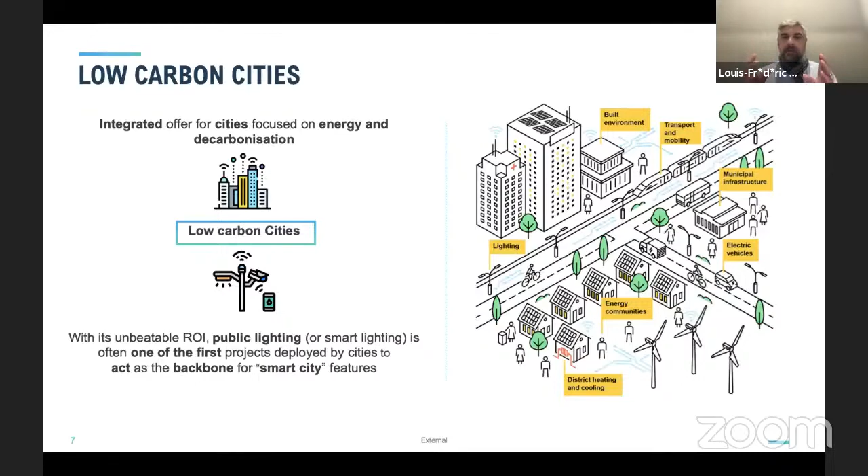You see on the right part of the slide that municipalities, if you want to go to sustainable cities, you need to mobilize lots of solutions. The question is, what is the appropriate bundle of solutions you need to offer? It could be district cooling, it could be energy communities, it could be lighting, it could be energy efficiency in buildings, it could be traffic, smart mobility, sustainable mobility, whatever you need. But the most important thing is you need to know where you want to go and be ensured that the infrastructure that you will mobilize, renew, or develop will be able to handle various services to be offered.

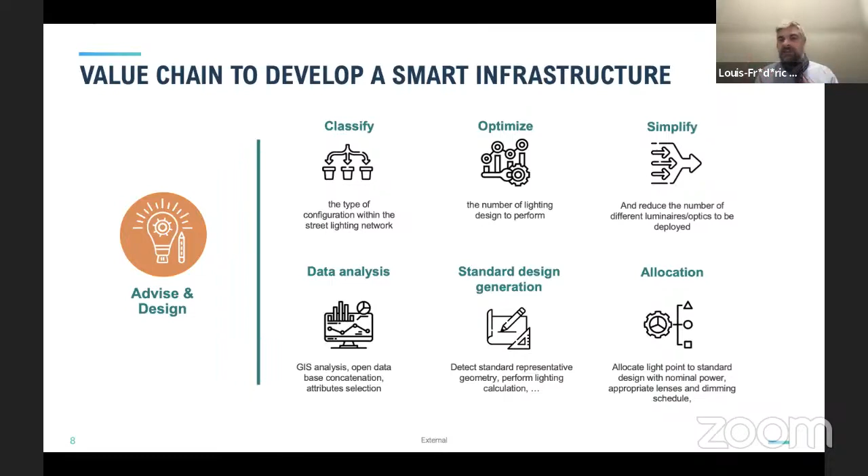To do so, we believe it's important to advise and design, meaning that you need to classify, optimize, simulate the impact, simplify, really take advantage of the data on the ground. And we are very, very active in that area in the regions about data analysis, making standard design and generation in order to industrialize, scale up, and allocate.

Then using digitalized solutions to build and have an effective procurement process, mainly under the PPP framework. Definitely this is the most advanced one, and this is the one that offers the most transparency for municipalities and capabilities. You need to contract properly.

You have also to combine what I've mentioned earlier in the discussions: the supply of energy, how to generate on-site generation, how to generate renewable energy on your territory, and embedded flexibility. Flexibility, energy storage, electric or thermal, is definitely key in the future.

The third point is how you engage with your stakeholders, because a municipality is a bundle of various layers of population, citizens, administration. So you need to engage your stakeholders. You need to build environmental plans. And then you have to operate and do the things.

So you have to monitor the performance with the KPIs. You have to digitalize your solutions, and you need to be able to develop new services all the time. And to be able to do so, you need to have thought before, one step before, about this smart and mutualized infrastructure. This is key.

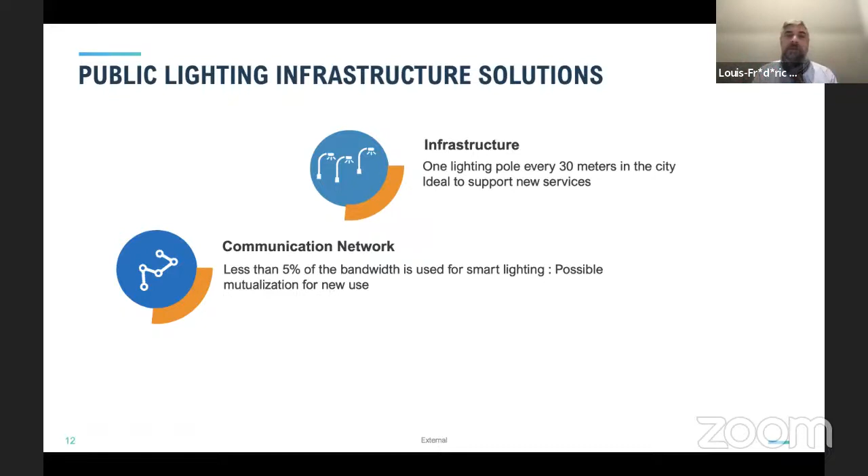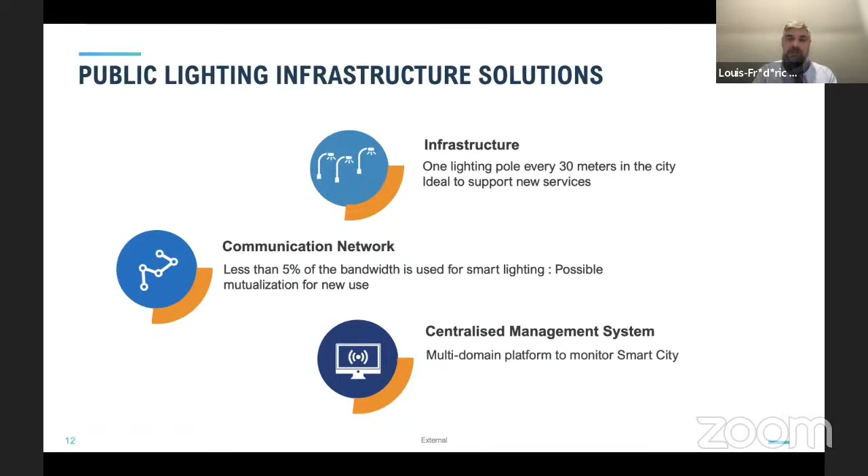We will also have a centralized management system, so rather than having people patrolling everywhere, the system will be smart and will send alerts. We will only need to react when there's a default on the system. This is far more efficient than the previous way we were operating the infrastructure, definitely. With this centralized management system, you also have the opportunity to oversee many activities on the infrastructure. This is the kind of ideas you can develop on one infrastructure—it could be mobility, security, communications, well-being with air quality sensors, temperature sensors, dust sensors, and of course a very good and efficient lighting offer.

If you want to go a bit further—remember, we thought it was good to have a renewable supply, having smart infrastructure in the middle of that—then you can accelerate the pace to go to zero carbon cities. You can go a step further and have the appropriate bundle to go in every direction needed to accomplish the vision.

This is definitely where I want to showcase this public-private partnership approach to really boost the energy transition. What is key now for municipalities is to benefit from expertise, finance, and long-term perspective. This is where the public-private mechanism is a real good opportunity, because of the capex intensity. If you want to invest in lighting, energy efficiency, solar panels on buildings, district cooling, mobility, EV chargers, or public transportation—whatever solutions are appropriate to your territory and municipality—you will have to invest a lot of money, and you have to stay on a long-term basis and offer economic and financial performance for both parties. For the public, and I'm very clear on that, we need to share the value with the public authorities.

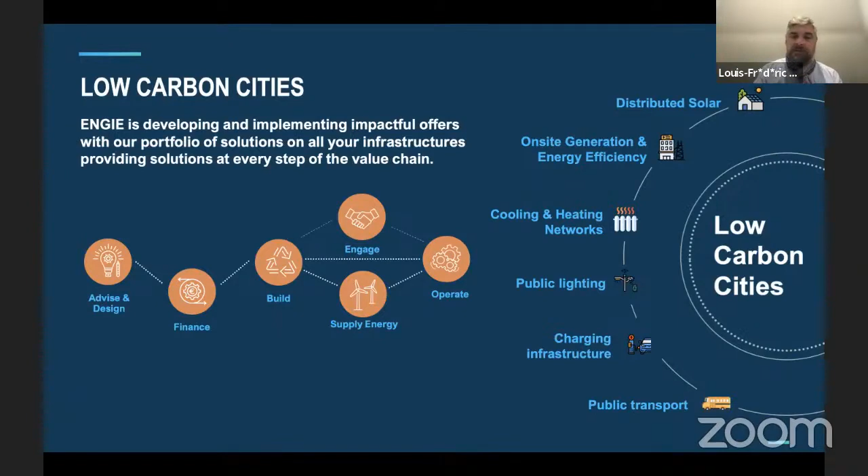Here's some case studies. Milpitas in United States. This is a 10-year smart city program for energy and water savings.

Within that contract, we have installed 200 kilowatts solar PV, quite small, 5,000 smart meters for water and leak detection, 6,000 street lights, and we have invested money, 1.5 million dollars saved for the municipality. On the lifetime savings, this is 50 million in energy savings and operation and maintenance savings. So this is quite huge for a municipality.

Angers Métropole in France. This is the second smart city contract in France, the biggest one. It's a 12 year contract where we will develop smart lighting, smart savings in buildings, smart water systems, and energy efficiency in all the public buildings. So this is really, really key. And they have also safety integrations. On top of that, there will be a digital twin and a digital hypervision solution that will benefit the municipality's team to really oversee all the activities in the municipality.

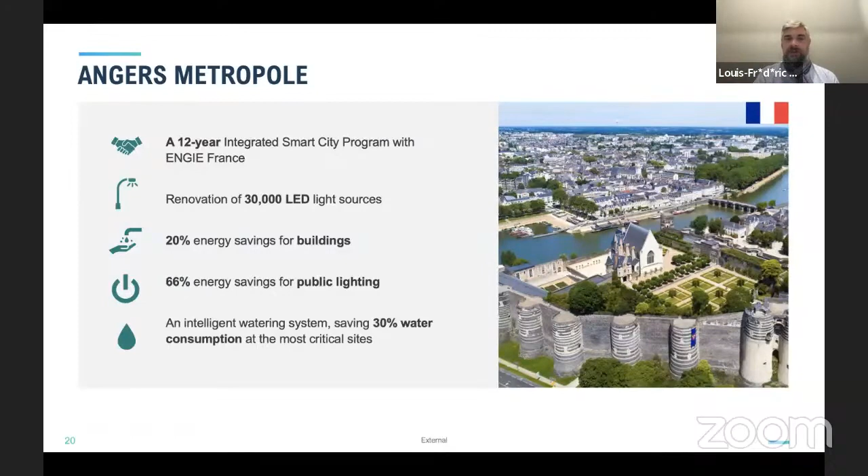Santa Barbara Unified School District. This is a 10-year contract with solar. We have embedded energy storage. We have also embedded a 28-year PPA, the power purchase agreement, with performance guaranteed. So you see that we can take that commitment.

One of plenty of examples just to showcase how we bundled various solutions depending on what are needed on the territories.

Ohio State University, this is a 50-year contract with solar, with battery storage, with smart meter. Now we have embedded also lighting, geothermal energy, biomass.

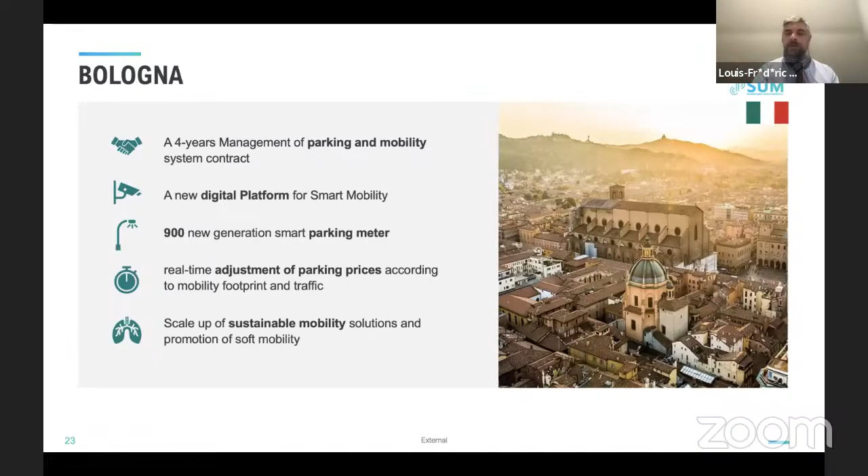In Bologna, this is a parking and mobility contract. So we are able to manage the price of the parking slots to adjust in real time how many people we want to come into the town center. In Niteroi, it's about safety and so on.

Thank you for your attention. What I want to resume in a nutshell is that you need to think about how to mobilize at maximum your renewable potential, think about smart infrastructures in the middle, mutualize on them, develop new services, and finally find under the PPP model the most appropriate bundle of solutions you need to deploy on your territory to go to a sustainable city. Thank you.

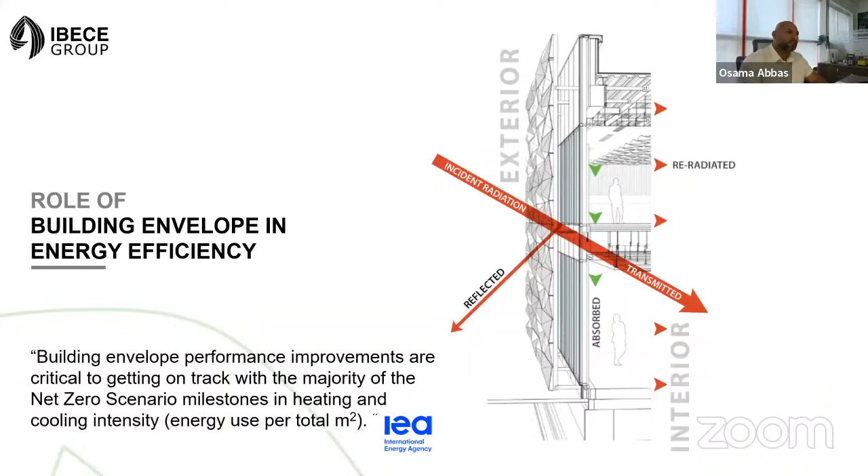Here we're going to talk more about the building envelope. It's envisaged as a kind of glass skin, or a pot, in which people live, and it basically separates the outside from the inside. That's the function of the facade, the building envelope: to provide thermal comfort, to provide a good environment for people to live in, to feel warm when needed and cool when needed, and not to be affected by external weather elements surrounding the building.

It has the function of shielding tenants from the sun, allowing enough daylight, and preventing wind, dust particles, and pollutants from coming into the building, as well as handling rain so there's no water infiltration. Some other aspects relate to acoustics and the safety of the tenant as well.

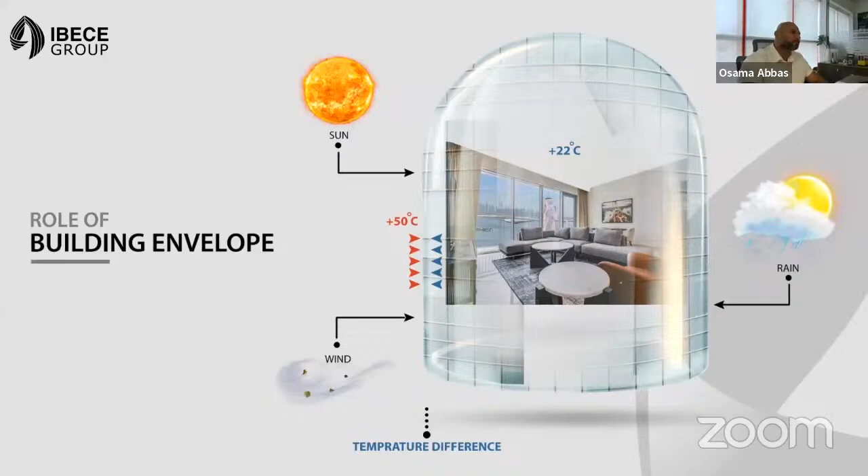According to the International Energy Agency, there's a big shift towards removing the old stock type of facades and using new types of facades. As an example, throughout the years there is a trend to use more energy-efficient materials in the facade.

The building envelope, according to the IEA, is expected to save almost 6 exajoules in 2050 under the 2 degrees Celsius scenario. If we're able to reduce our cooling loads by 2 degrees, we can reduce 6 exajoules by 2050, a number equivalent to the current total energy consumption of the UK.

You can see from the scenarios that inefficient facades formed of single pane windows, no insulation, and high air leakage are quickly being replaced by highly efficient elements. For example, low-E glazed windows, high levels of insulation, and low air leakage, leading to very advanced, zero energy buildings with what we call passive facades that help a lot in achieving the net zero requirement.

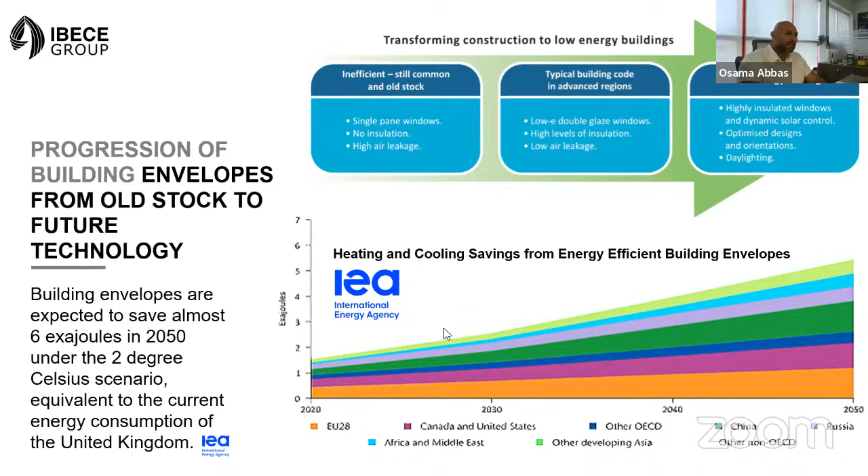This is also an interesting slide. Here we talk about retrofit, because while we can always talk about new buildings and how we design them to be energy efficient, the fact is a new building 20 years down the line is also an old building, let alone the old buildings we have now. There must be a way to understand how much energy savings we can make by retrofitting facades in existing buildings.

This is a simple scenario when we're taking a baseline scenario of inefficient facades, where we are consuming around 650,000 kilowatt hours per year of energy. Then we do 3 levels of retrofit. Retrofit level 1 is the basic retrofit, which is not invasive. Then we go into a medium type of retrofit, then into a deeper retrofit.

As you can see, ladies and gentlemen, the values differ a lot. The building used to consume 653,985 in HVAC electric consumption. From 650K we go down to 570K, then 510K, ending up at 450K. So that's around 31% decrease in the amount of cooling load from our HVAC system.

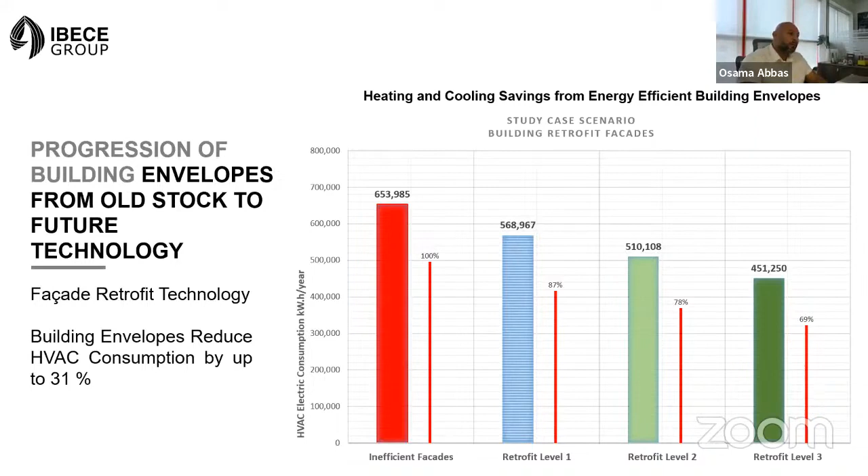Next slide, we're going to talk about what we as IBECE Group are doing to help support this. We use our expertise as facade engineers to create a system in which we are able to read the pulse of the facade. It's like when people go to doctors and take their pulse, heart rate, and blood pressure — it's the same thing here with facades.

What we basically do is have something called FESPA, which is short for Facade Energy Saving Potential Assessment. FESPA is a very detailed way of scanning the building to understand whether the facade is a source of energy leak or not. Accordingly, we determine how much energy is lost — through radiation, convection, conduction, etc. — and propose alternatives. These alternatives can easily be linked to simple payback schemes, so CFOs can know how much they'll have to invest and how much will be returned by the building in savings.

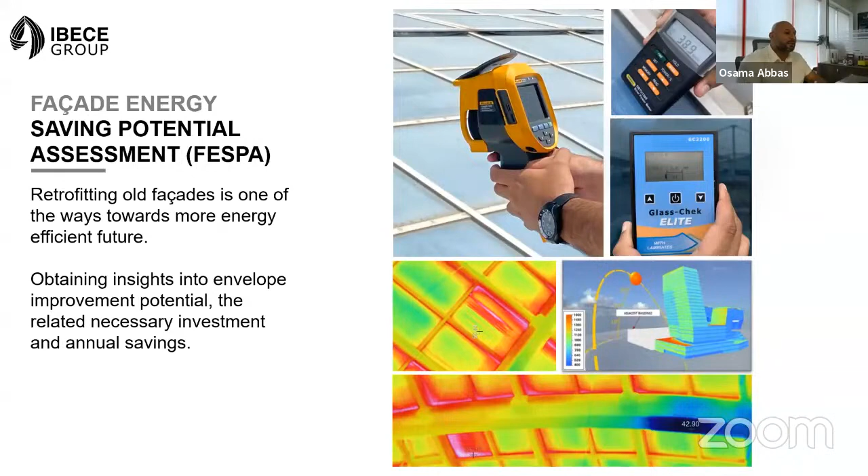This seminar goes under a big title, Smart Cities. That's why we here at IBECE decided to talk about smart facades as well, not only about energy savings, but the smart facade, which also entails some savings.

What are smart facades? Here you see on the right, Al Bahar Towers in Abu Dhabi, UAE, designed by AEDAS and constructed by Al Futtaim Carillion. It's one of the few buildings in the UAE which is very responsive to the climate around it. So a smart facade is a technology-loaded advanced facade, in the sense that it enables the building to be more energy efficient, reduce carbon footprint, add real estate value, and provide users with the highest levels of thermal comfort, daylighting, and glare control.

Now why are smart facades able to do that? Well, when we design facades, we have the option to create dynamic and responsive facades, in which these facades change their size, their form, their opacity, so that they provide more comfort to the end user.

For example, if the sunshade here on the right, with its sensors, feels that the sun is hitting the glass at a quite high radiation value, the smart thing to do is to close up. So this thing closes up and opens up based on sensors and control units, so that if we have high levels of solar intensity, the facade closes up, reduces the amount of heat coming into the building, and therefore brings thermal comfort, because people will not feel hot.

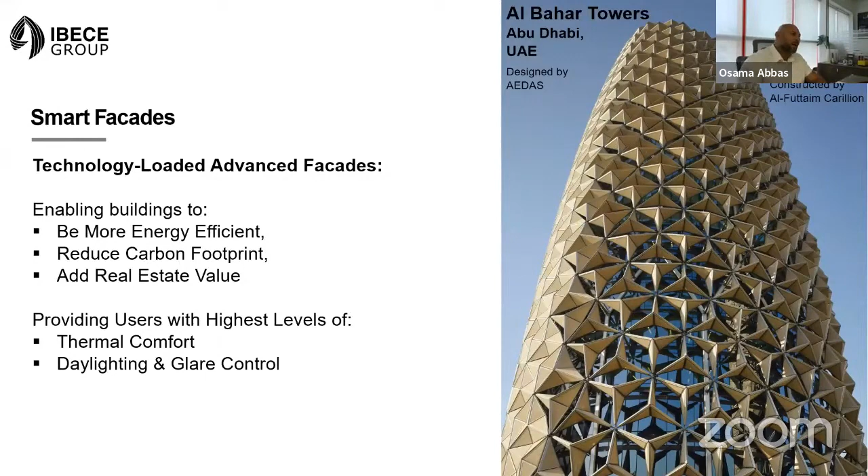This is also another example of dynamic facades where we have these kind of shades on the face of the building. They basically move up and down based on the requirement of the building tenants, connected to a central control unit. They are active and develop automated response to environmental changes, and they can change the shape, color, and texture. There are 4 different types of dynamic facades: mechanical, thermal, solar, and electrical, with mechanical being one of the most cost-effective, as the one you see in the Al Bahar project.

The thermal and solar types relate to gas infills inside the cavities of glass, where they react to the sun with electric impulses to change the opacity of the glass, which is a bit higher on the spectrum in terms of cost efficiency.

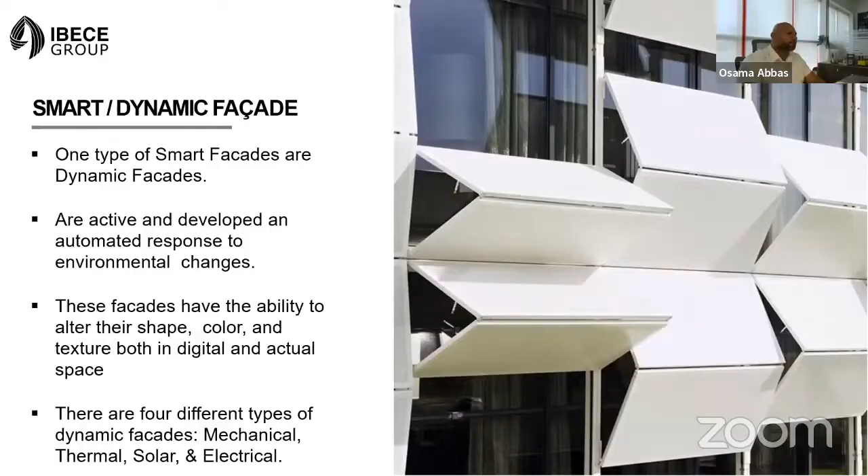Malak, I'm not sure if I exceeded my time or not. No, you are on time. Thank you so much, I'm on time. Yeah, I think 14 minutes. If there are any questions, Malak, I can answer them.

We will be asking several questions for such an amazing and important topic in the Q&A session. Thank you so much for such an important topic, mentioning the importance of energy efficiency and these innovative solutions, enhancing building efficiency, which is important for smart cities. Inshallah we will meet again in the Q&A session. Thank you so much. With all the pleasure.

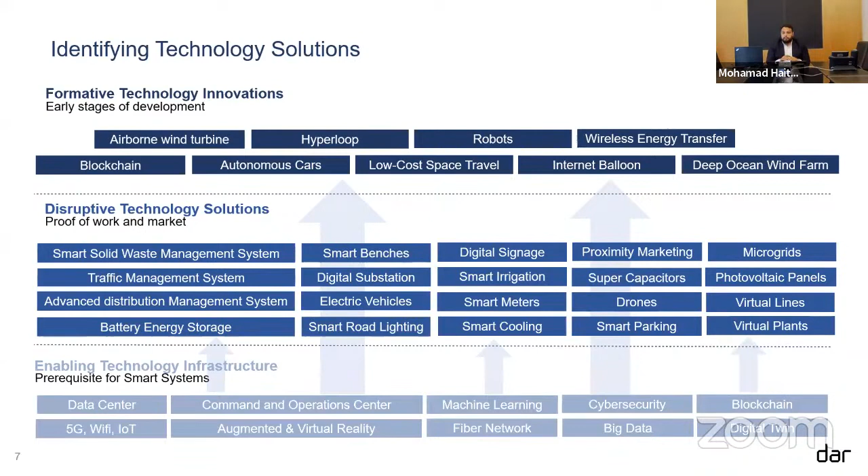Then we have formative technology innovations, which are technologies under development where we need to consider readiness, or some design factors within our current solutions, in order for them to be implemented in the future, such as internet balloons, robots, hyperloop technology for transportation, and wireless energy transfer.

So after we have presented what is a smart city, now we will present what is energy transition. Energy transition is the shift from fossil fuel-based technologies to renewable and green gas systems in response to climate change. Climate change is resulting from the increase of greenhouse gases, shown in the form of heat waves, forest fires, increased intensity of tropical storms, and the melting of the polar ice caps. It also has projected economic costs which are extremely high. Therefore, in response to climate change, energy transition procedures shall be taken into consideration.

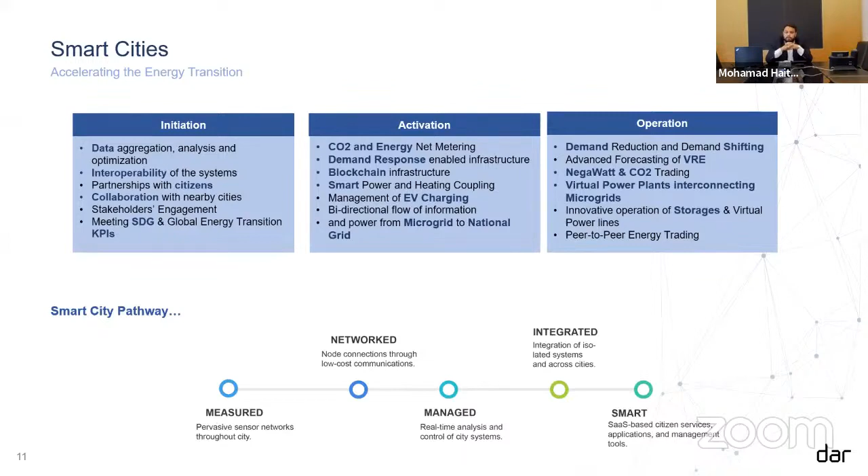The third pathway is through operations, where we can provide some innovation in the operation of these microgrids. It can be done by applying the concept of virtual power plants and virtual power lines, which we'll be discussing in the next slide, and applications such as peer-to-peer energy trading. So the smart city pathway can be summarized as: first, measured networks and interconnected systems, all managed and integrated to provide smart applications, where smart will be as a service, ensuring the well-being of citizens.

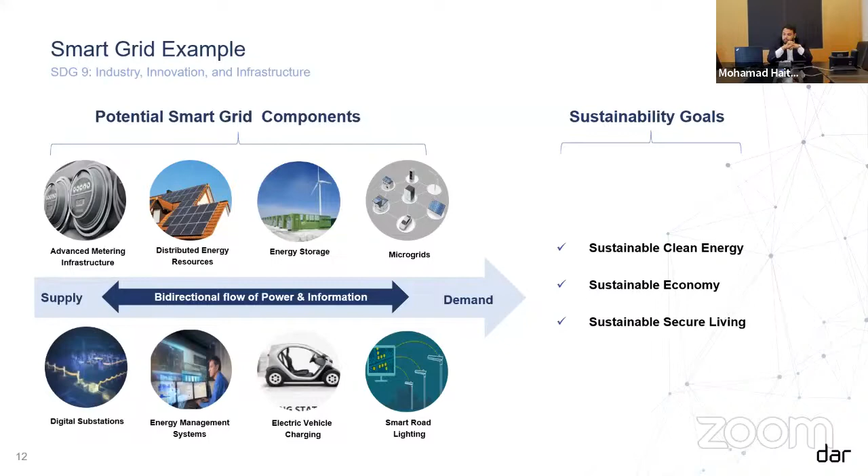Here we'll take an example of a smart grid. A smart grid is mainly composed of the following systems: advanced metering infrastructure, distributed energy resources, energy storage, microgrids, digital substations, energy management systems, EV charging, and smart road lighting, with bidirectional flow of power and information between supply and demand. All of this to ensure sustainable clean energy, sustainable economy, and sustainable secure living.

So the smart grid has a circular architecture, interconnection between generation resources from the national grid down to microgrids, with a citizen-centric approach, making the citizen the center of the equation. So he is now a consumer and a producer at the same time. He consumes energy from the grid, and he produces energy, let's say, from his rooftop photovoltaic or from vehicle-to-grid application, or he can sell back energy to the grid through storage.

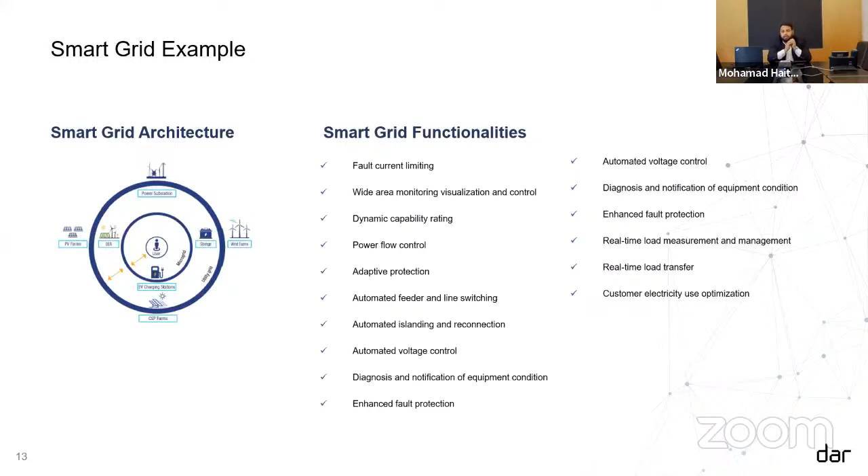So the smart grid has several functionalities, such as fault current limiting, power flow control, adaptive protection, automated voltage control, and real-time load measurement, etc. So it has this automated self-healing applications and instrumentation and control solutions and applications.

One of the characteristics of the smart grid is that it is unbundled. So in order to activate the smart grid application, we need to ensure that the value chain within the smart grid is unbundled. Generators are separate from TSOs, which are separate also from DSOs, separate from traders, and separate from retailers. And at the end, we have the prosumers, which used to be consumers.

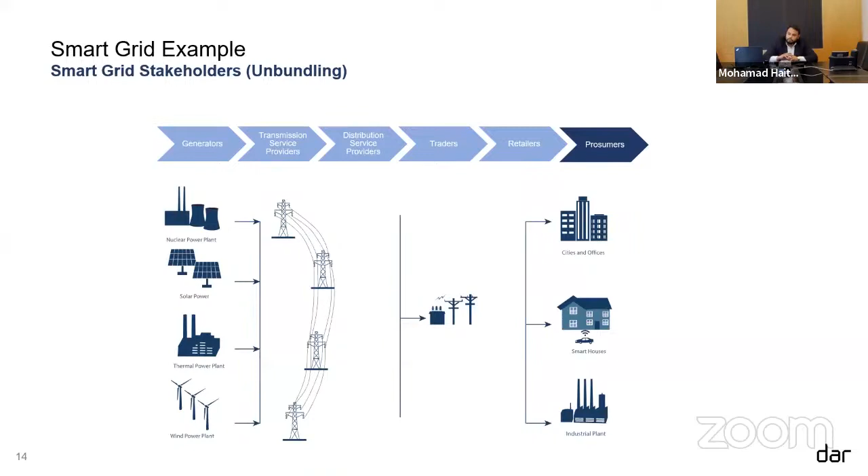Now, let's take some insights and innovative applications that can be done within smart cities, mainly within the energy systems related to smart cities. One of these applications is the Negawatt. So what is the Negawatt? It's a theoretical unit that reflects the amount of power or energy saved or conserved as the result of technology upgrading, structural changes, or mitigation initiatives.

In other words, Negawatt is a unit concerned with energy efficiency. So whenever I reduce my energy consumption, this is the Negawatt. And studies show that investing in the Negawatt is 40% less than investing in the megawatt. So for us to increase the capacity will cost us a certain capex. It will be cheaper to invest in reducing this installed capacity.

If we can finish in 1 minute, please. Yeah, sure.

So in order to get this innovative application of a Negawatt, we need to implement certain infrastructure, from metering infrastructure to ICT, also to blockchain layer, to enable the trading, so people can reduce their consumption and get this unit in form of a token and resell it back on the grid.

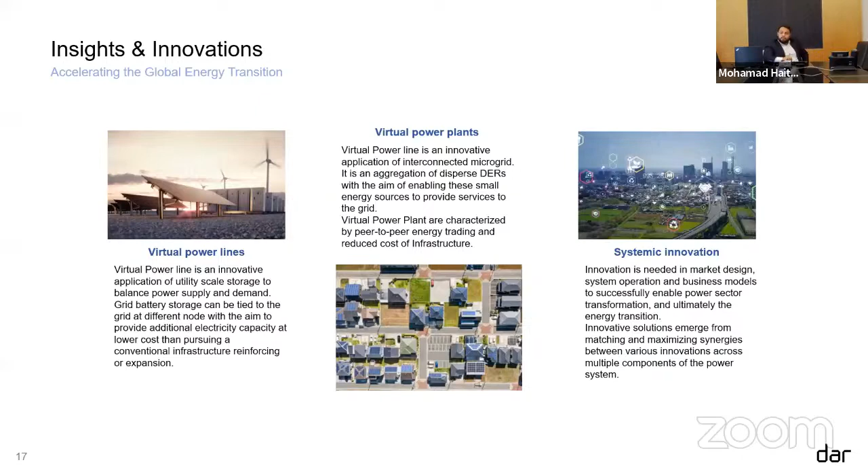Smart cities shall accelerate the energy transition by endorsing energy efficiency and renewable energy generation, and by limiting the impact of electrification on existing infrastructures. That's it, thank you.

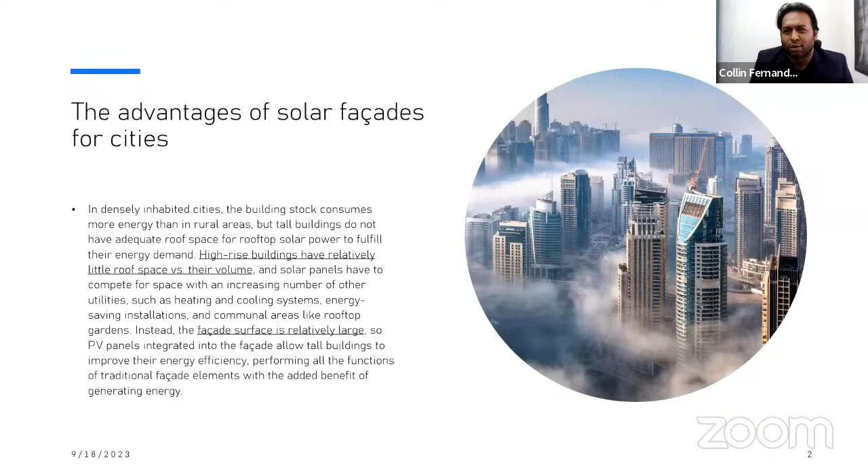The advantage for solar facades, what we see mainly, is that high-rise buildings have very little roof space to accommodate solar panels. So what we came up with is a nice replication for the buildings. Architects come up with beautiful colors and designs, and they don't want that to be changed over by black solar modules. So we have come up with some designs.

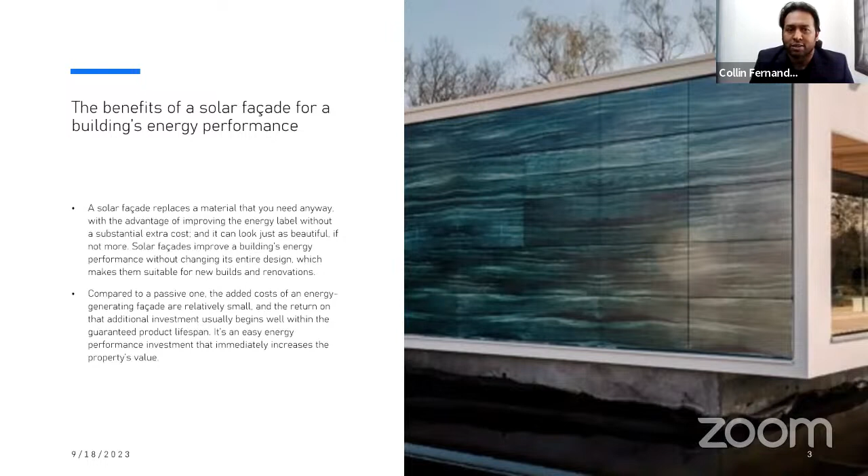If you see on the right, this is one project we have already done in the Netherlands. A solar facade does not need to be black or blue, but can be of any color, any shape, any design - however the customer or client likes it, or mainly whatever pleases the architectural view of the society or the city.

So the benefit of solar facade is we can generate electricity from the sun, reduce 40% of HVAC cooling load, and reduce 20% of lighting load, achieve daylight lighting, and reduce peak demand. I'll tell you a little more about how we reduce the peak demand.

Usually in office buildings, the peak demand rises at 9 o'clock, let's say, and again at 3 o'clock. That's when the sun rises and the heat comes down to the building, and the building gets really warm. To cool that off, we need a really high amount of HVAC load, which is cut by a solar module that will generate electricity but at the same time block the heat from entering the building, reducing peak energy demand, and also helping reduce grid congestion.

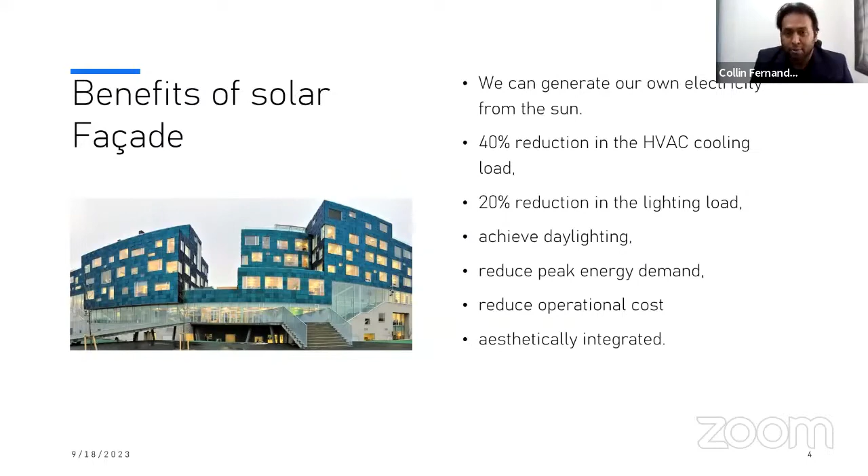And finally, of course, there is a reduction in operational cost, and it is aesthetically integrated. So like I previously said, there are no problems with the aesthetic design.

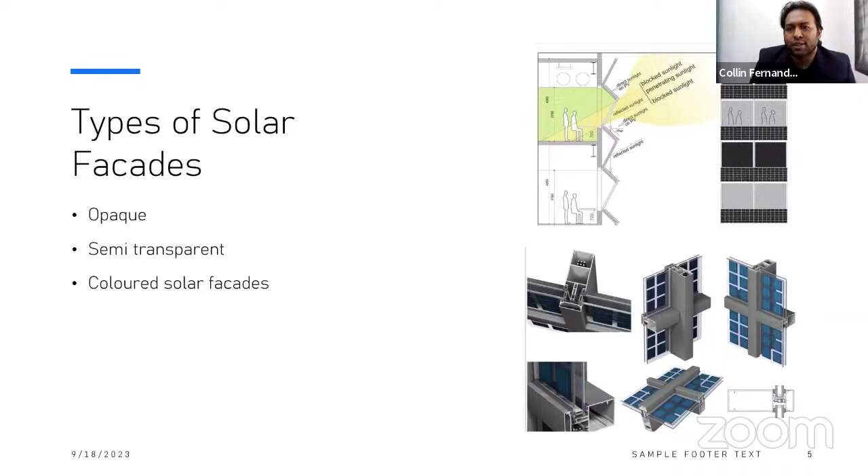The types of solar facades are basically opaque, where you cannot see anything from the inside, but there are also models where we can design solar modules completely oriented towards the sun, with glass oriented towards the street. So you have an uninterrupted view, but at the same time get daylight, and block the heat and sunlight. It can be integrated on any facade construction material, so it doesn't need a special fixation system - with the regular fixation system, this can be integrated.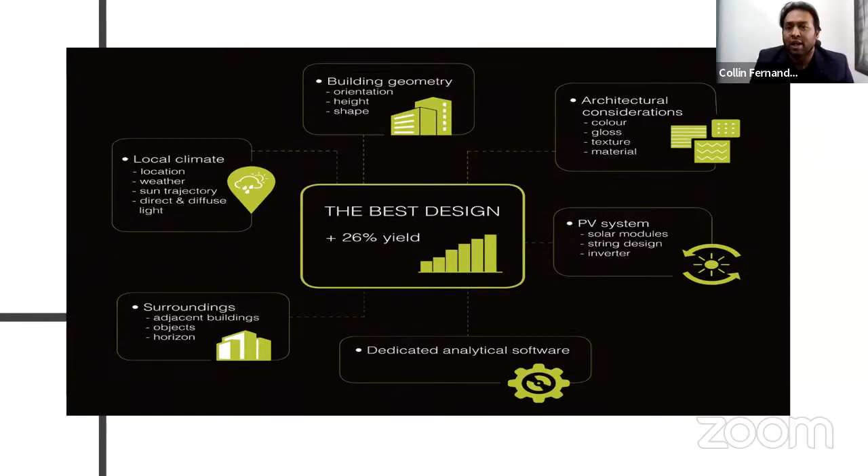I'm sure a lot of people understand how the solar system works, but in a facade it's a little more complex. We have dedicated software to analyze these factors and put in place a really nice design which will give us the best yield. And of course, I'll talk about the finance next, because finance is key in this part.

When we talk about BIPV, Building Integrated Photovoltaics, whether you're looking at a new building or replacing an existing facade, there will be a cost that's incurred, which over time will repay itself. When we put in BIPV systems, it's about 40–50% higher cost than a regular facade. But if we can add a nice financial scheme where they don't pay that extra cost upfront, but rather recover that cost over a period of 5 or 10 years and then repay it, it will work and be really beneficial for the client. That's what we're built for and what we're trying to do.

Finance really plays a key role when planning a building. Let's say we take HVAC capital investment, lighting capital investment - when we wrap the building with a BIPV solution, there's going to be a significant difference in the capex. It will increase the capex by a marginal amount, but that can be recovered over a period of time. So these are the key factors we can really look at for the solar facade.

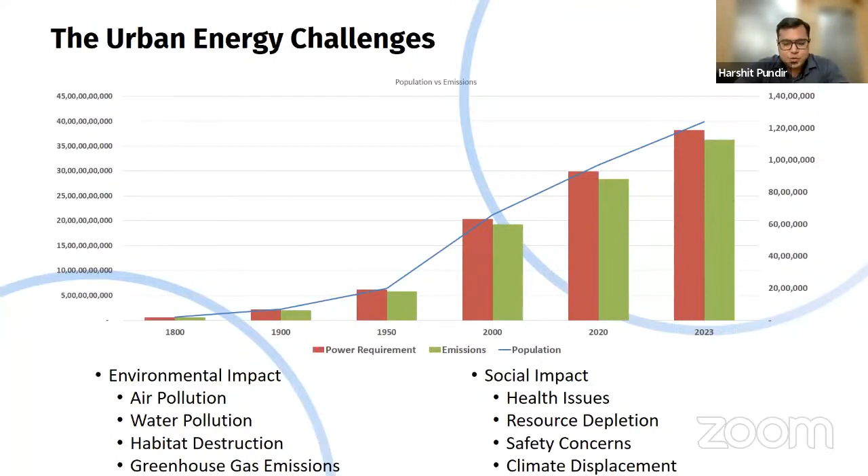Moving on to the next one: benefits of renewable energy. As we all know, renewable energy is a clean resource of energy.

Sustainability: we talk about resource availability. Unlike fossil fuels and nuclear, which are somewhat finite sources of energy and are depleting at a faster rate, renewable energy sources like sunlight, wind, water, and geothermal heat are examples that are not going to run out over a human time scale.

Next is environmental impact. Harnessing renewable energy has minimal impact on the environment compared to fossil fuels. It reduces habitat destruction, and pollution of air and water is reduced, with no chances of catastrophic damage due to accidents.

Reduced emission of greenhouse gases because of using renewable energy sources improves air quality and mitigates climate change, helping limit global warming as outlined in the Paris Agreement, which aims at limiting global warming to well below 2 degrees Celsius above pre-industrial levels.

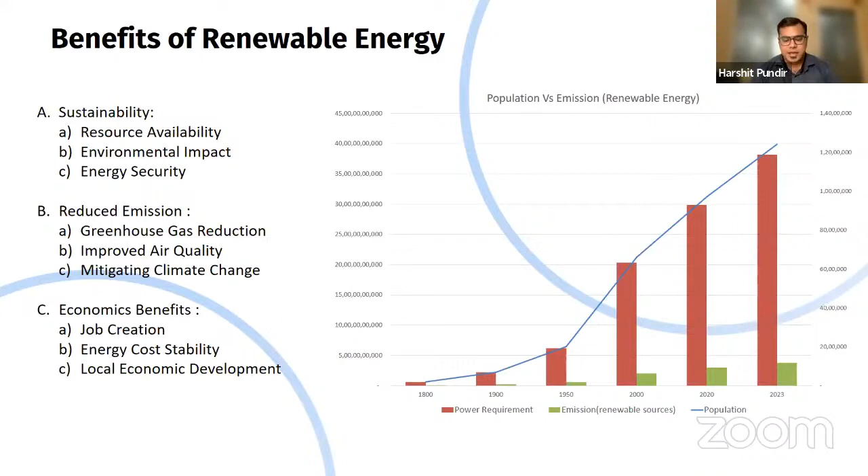There are several renewable energy technologies available in the world today. The first is solar energy. We utilize solar energy for generating electricity, heating water, and more, significantly reducing power requirements from fossil fuels.

In terms of smart cities, solar energy is one of the best renewable sources for urban scale use, as it is highly suitable for urban areas due to versatility in installation. Panels can be placed on rooftops, integrated into building facades, or incorporated into urban infrastructure like bus stops or street lights. Since solar energy is decentralized, it's an excellent choice for smart cities aiming to reduce their carbon footprint.

Then we come to wind energy, which is typically used on a larger scale. Offshore and onshore wind farms can be installed on the outskirts of smart cities. With technological advancements, smaller wind turbine designs for buildings are now available, though careful planning is essential to mitigate noise and aesthetic concerns. These can be used on high-rise buildings to generate electricity and reduce fossil fuel consumption.

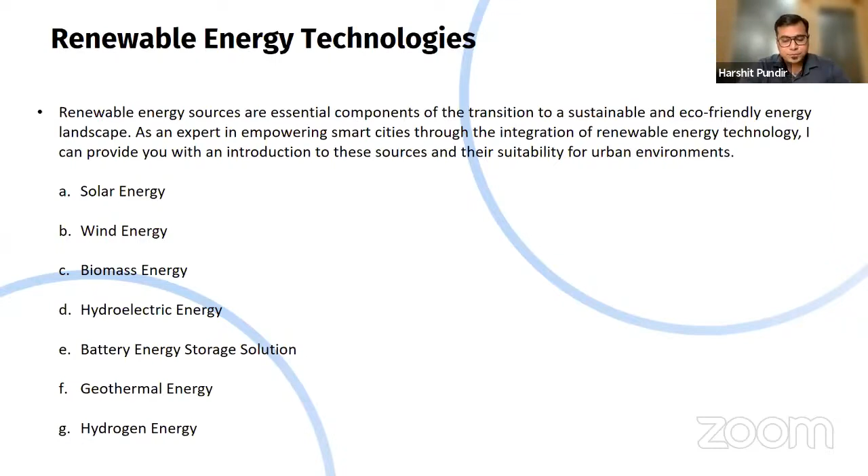Then there are innovations and emerging trends. Emerging technologies for energy optimization are at the forefront of efforts to create smarter and more sustainable cities. One example is energy storage systems, which can be connected to wind farms, solar energy, or hydroelectric energy, storing surplus energy and providing it during peak hours when electricity requirements are high and renewable sources aren't producing enough.

Blockchain technology can also be implemented. It's a decentralized digital ledger that securely records and verifies transactions across a network of computers. In smart cities, blockchain can enable peer-to-peer energy trading among residents and businesses, allowing transparent and efficient energy transactions, reducing the need for intermediaries, and potentially lowering energy costs for consumers.

Advanced grid management system, using sensors, real-time data analytics and control mechanisms. In the daytime, power to the industrial or commercial side is required on the higher side than the residential one, so it can efficiently transfer energy to the required areas and lower the energy requirement there. Vice versa, in the evening, residential complexes require a higher amount of energy, so it can transfer to that, managing supply and demand efficiently.

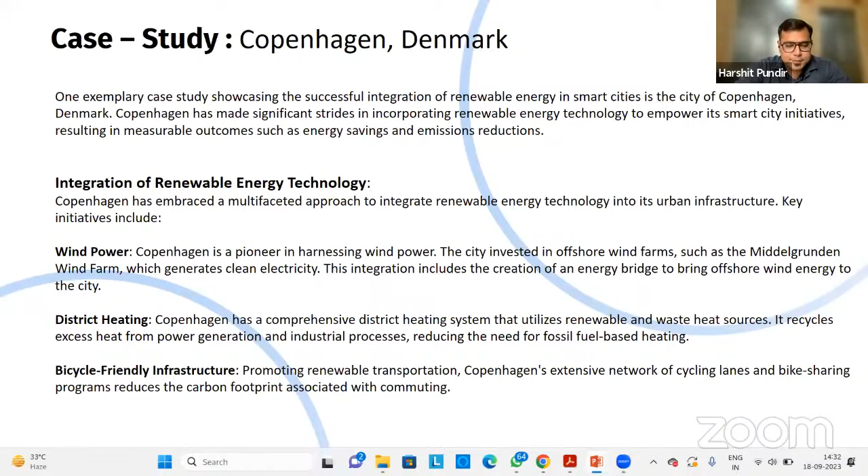After implementing these renewable energy technologies and other policy-based decisions, they have achieved measurable outcomes. In terms of energy saving, they are contributing around 4% of the city's electricity demand to renewable energy sources, and they have reduced their carbon emissions. They have set ambitious climate goals, aiming to become carbon neutral by 2025.

Becoming carbon neutral by 2025 will eventually be beneficial in terms of health, as it reduces the emission of harmful gases. Air quality improvement has been seen in Copenhagen since reducing emissions from fossil fuel has resulted in improved air quality and public health, enhancing the overall quality of life.

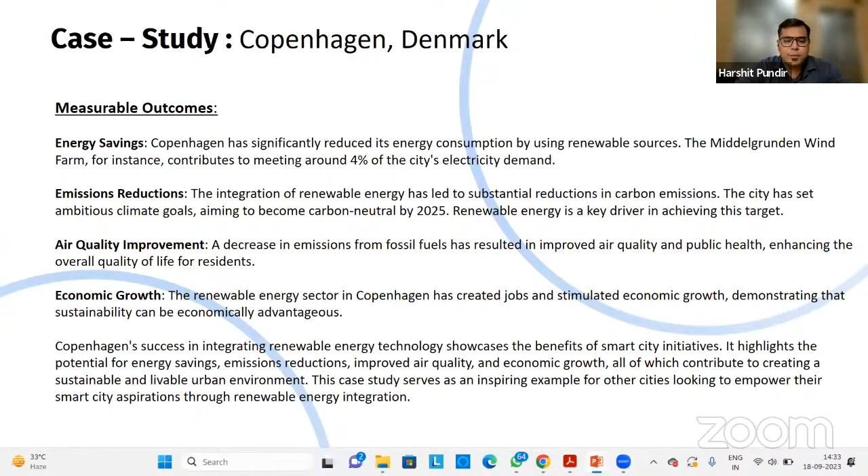Economic growth: as seen earlier, renewable energy resources are creating jobs in terms of operation and maintenance, increasing jobs and demonstrating that sustainability can be economically advantageous. Copenhagen's success in integrating renewable energy technologies showcases the benefit of smart city initiatives, and empowering them with renewable energy sources will have a larger impact.

There are some policies and investments that can be brought into the picture when discussing smart cities, which can be much more beneficial for society as a whole. Subsidies and tax incentives can be offered by the government for people who install renewable energy sources at their own house and become a prosumer.

Feed-in tariffs exist in most countries and areas, provided to prosumers who have small energy generation plants in their homes or industries, which will eventually reduce energy consumption from fossil fuels and increase the quality of life. Renewable portfolio standards and renewable energy targets are another policy tool.

Government can set renewable portfolio standards and targets for industries or residentials to increase the popularity of renewable sources, and non-compliance can be penalized to increase installations of renewable energy sources.

Net metering and grid integration policies can be brought into picture, where the prosumer can utilize the required amount of energy and the rest can be passed on to the grid, which can be utilized by other consumers.

That's all from my side. Thank you, thank you so much.

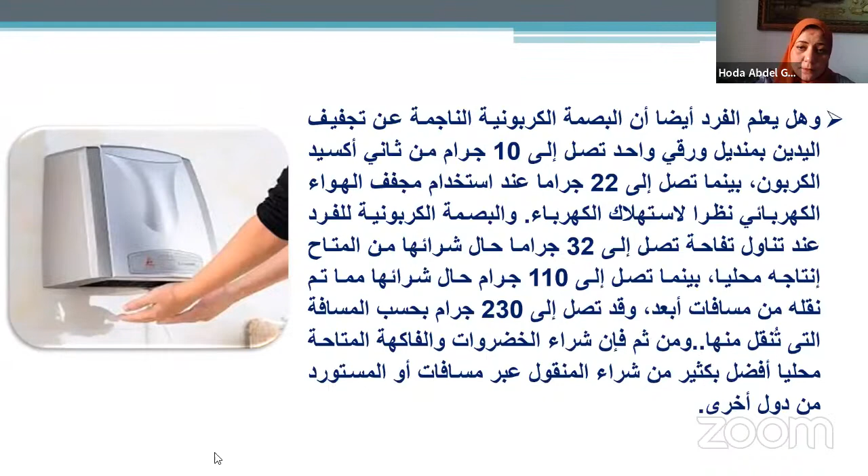طبعا من الأرقام اللي ذكرتها أكيد هيتضح إن قرار الفرد اللي بيتخذه بيؤثر على البيئة بشكل كبير. هنا بعض الأرقام الهامة اللي توصل إليها فريق بحثي بجامعة ليدز البريطانية. الفريق توصل إن لو الفرد استغنى عن التنقل بسيارة سيوفر بصمة كربونية بمعدل 2 طن سنويا. أيضا عندما يستخدم مصادر طاقة متجددة سيوفر 1.6 طن. عندما يلجأ إلى النقل العام سيوفر 0.9 طن، وهكذا سوف يتضح من الرسم التالي.